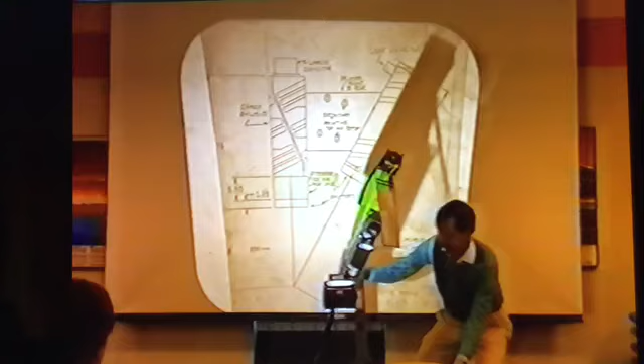Here, you want to rotate that so it picks up better in the camera. You're right, 6 degree. This thing here is a laser box. This is a camera box with its cover removed to show here's the camera and there's the lens.

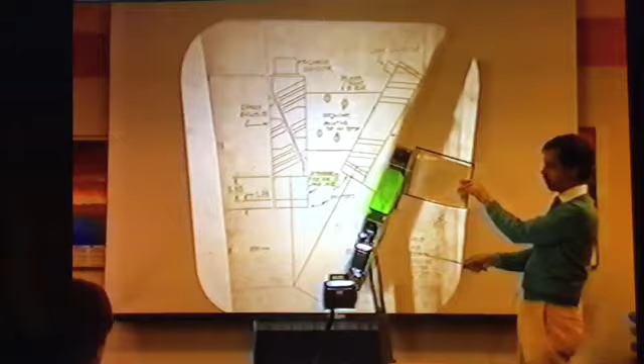These modules are also available in their non-modular form. So you can mount the laser box alone, you can mount the camera box alone, and use them just as wonderful camera enclosures. Oh, they're connected together. But now I'm finished talking about it, so I don't care. I'm just going to push it out of the way so I can do the view graphs.

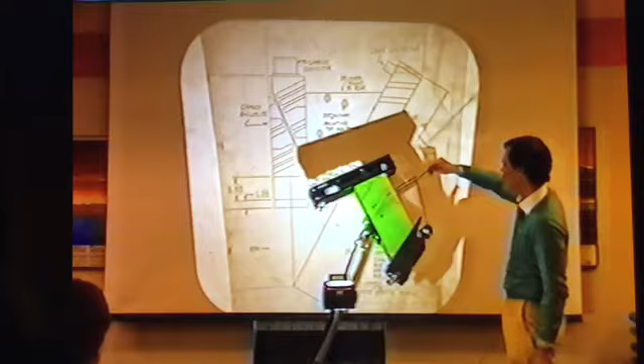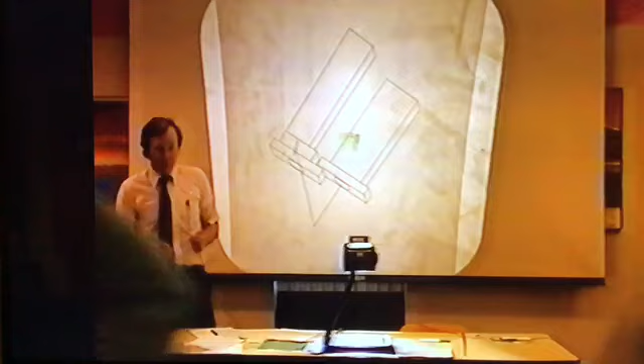In other words, it's not from where the camera is inside it here, but it's the clearance you got out in front. This is the parallel design, and there's a couple of the cross-member designs, and the others will all be parallel because of the tight space constraints there. Any questions? Really, that's it. Yeah, one more question. How's the mirror fixture? Mirror happy? Yeah, that's it.

The mirror is on a rotary device with a friction stop. Can you ship it from here to Detroit and things aren't going to jar out of position? You won't be able to jiggle it and hear it spinning around inside? It will be fine. How do you change the separation distance? It's locked, the mirror is locked after its position.

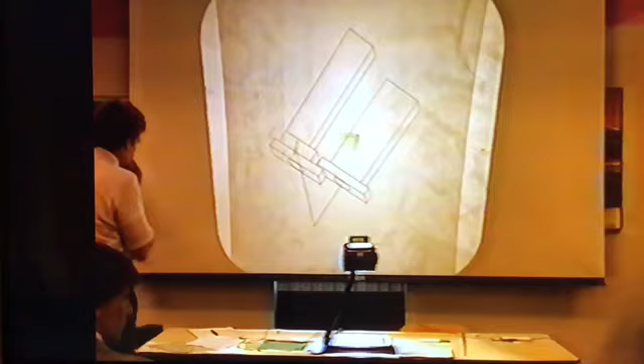Is it changed? No, there's 3 pieces like this. There's a 4-inch wide crossover in the middle, which has the 3 mounting surfaces, one to each side like you have here, and one to the rear. So it's fixed.

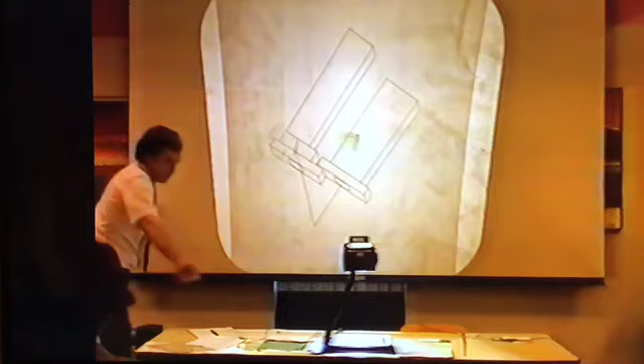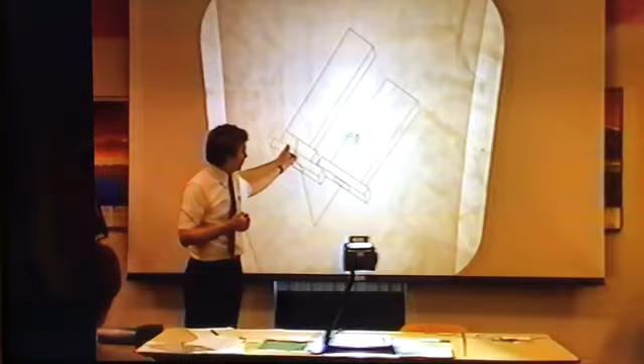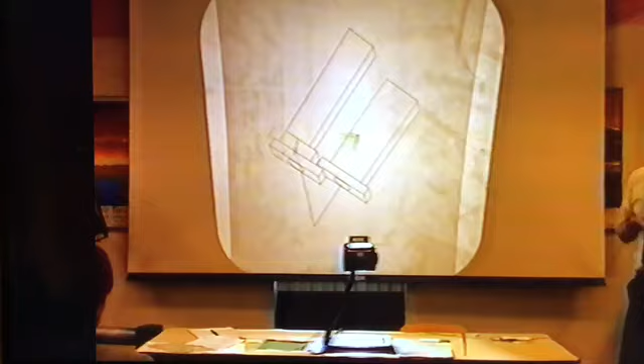Where do you do 20 degrees? Our normal modules now are typically 30 degrees and sometimes 45. In setting up that angle, right now the angle is established by that tube, so we have a certain control on the angle.

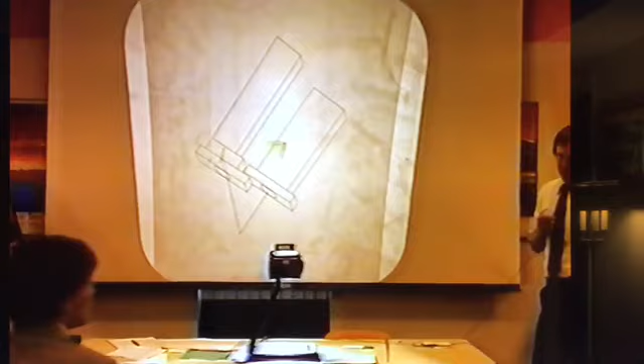Why do some of the current modules have a tube that long? It's real big, bigger than that. It's inside here, inside the tube. I have a print back there if you're interested.

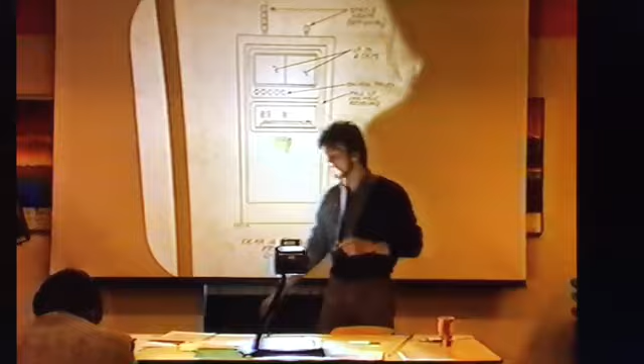Some of our customers wanted multiple gauging, wanted multiple vision systems put together, some slave to each other, and so on. AV4s tend to take up a lot of floor space, and they cost us a fortune to build. So we tried to come up with this, which is a NEMA 12, a true NEMA 12 cabinet, unlike any of our other systems. If anybody thinks our other systems are true NEMA 12, they're wrong.

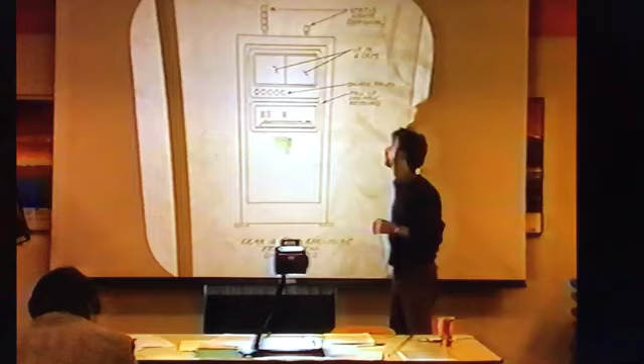This is front and rear access only. It has a fold-up, lockable keyboard. All the access panels are sealed. So it is truly NEMA 12, unlike our other designs.

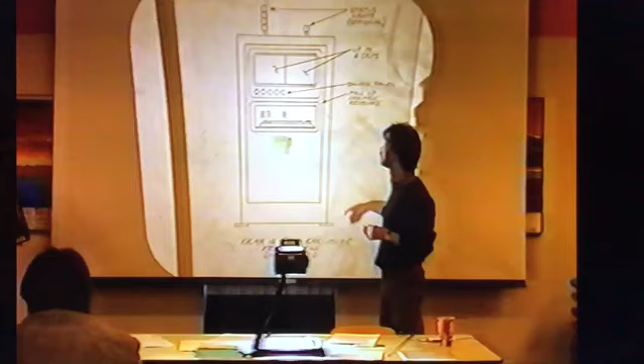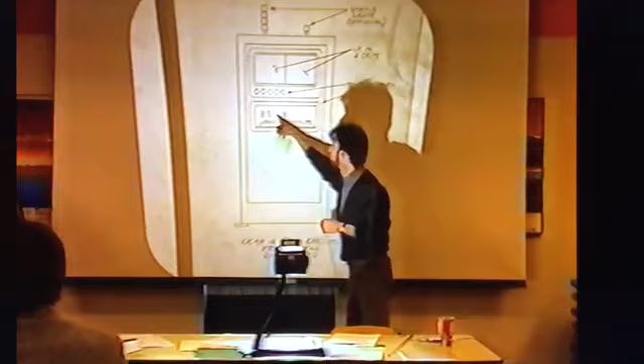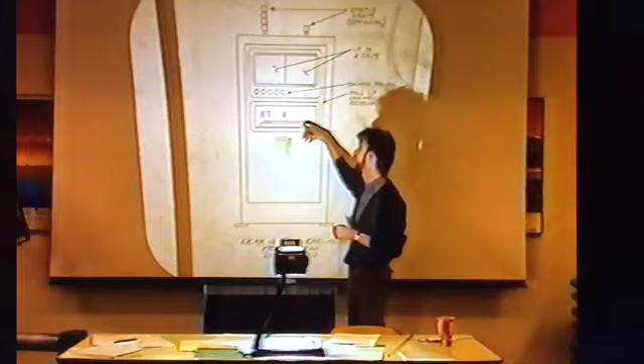It can take up to 3 AV3s. Up to 2 CRTs could be provided for it. The fold-down keyboard can address one or all of the AV3s via this little selector switch here. From the AV3s, we have moved the camera select and pixel buffer system select switches into the keyboard section of the box so that you don't have to open up the box to access the AV3s.

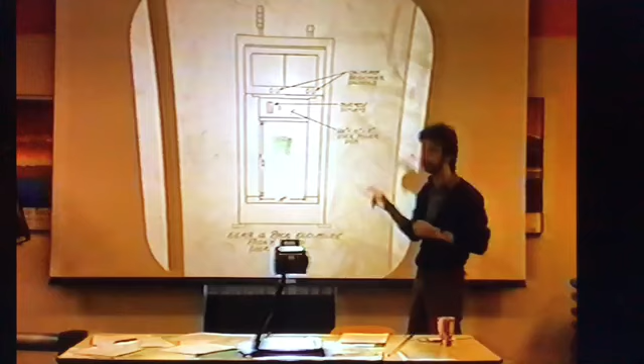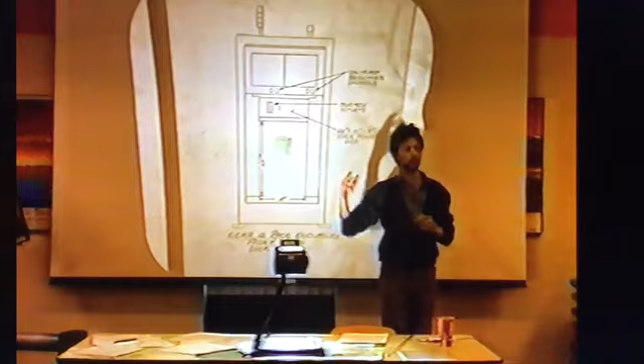If you look at the inside of the box here, this is with the front door open. You'll see that you have the two CRTs here, contrast and brightness controls. The standard configuration comes with one CRT. GM10 Glass asked to have a CRT per AV3, so therefore we came up with one. The panel below this is a courtesy outlet panel, which has an outlet and a circuit breaker on it for somebody to use a scope or whatever other type of debugging device you might want to plug in while you're looking at a system. Yes, Steve?

You can configure the AV3 - I'll get into that a little later. Okay, I just want to say what the box is.

There's 35 available inches of rack height, 19-inch rack height. That translates into 3 AV3s, or 2 AV3s with 2 laser distribution boxes, or some other number of combinations. The modules that we are designing for laser distribution, mux boxes, UPSs, and so on are half height of an AV3.